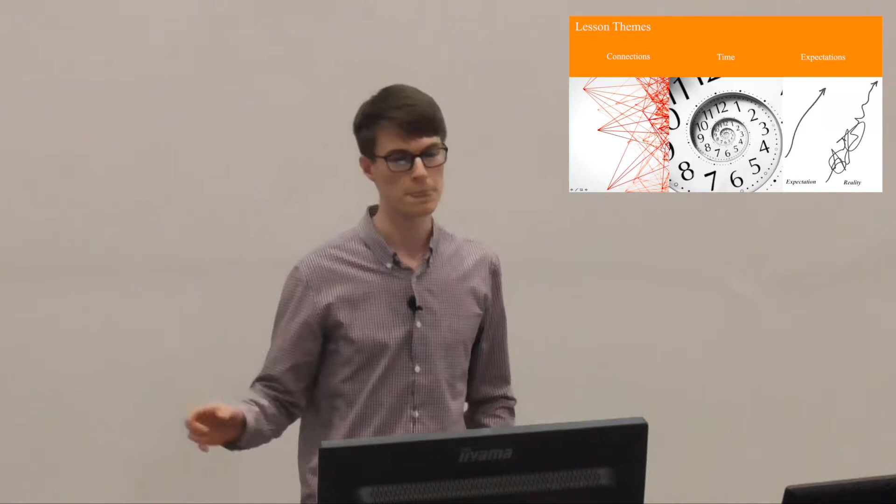Throughout what I'll be talking about, it was mentioned previously about the stages through a project from zero to all the way done. These are the RIBA stages of work that the Royal Institute of British Architects have established, and they help give guidance on what goes on at each stage of the project. So I'll be using that as a bit of a background and a reference.

It's not often you'll get to see stage 0 to 7 within 3 months, so that was a really, really good experience for me.

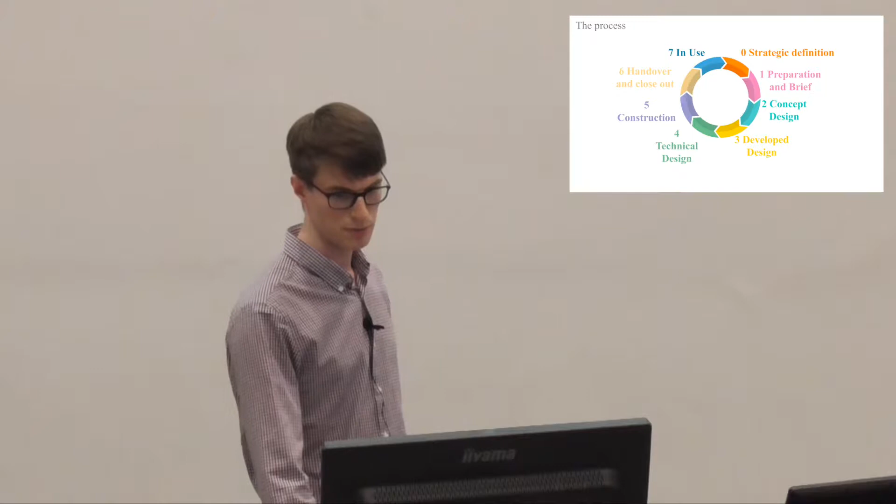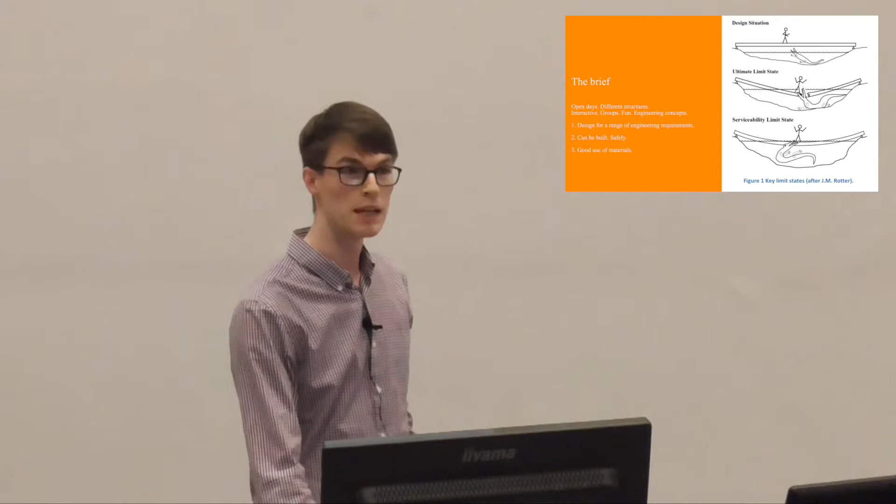We need to design for a range of criteria. The ideal at the top is where everything's all hunky-dory and it doesn't fall over or anything. We want to really avoid anything breaking. And the last thing is actually a lot of the materials we design flex a lot, and they'd be fine, but it'd be quite uncomfortable for you and me to be walking on a floor that does this. Structurally it's fine, but we've got to design for people, because people use it. Why else would we build things?

The fact that this project was to be built by students meant it needed to be built safely, and also be a good use of materials. Demonstrating what we do is important. So the bridge itself, a 3 meter span, quite small, but enough for a person to walk across, had to be built within these constraints.

So how do you start a project like this? Well, like any project, the appraisal of materials, some really quick ideas, just pencil and paper, and some thoughts about what might trouble you most, because that's what's going to trip you up later on in the project.

So having had a quick feel for form and materials, it was time to find someone to make it. And this was actually the first lesson: it's about using your networks, a bit like the other networks we're here for. Use those networks, they're really good.

I contacted over 15 fabricators, and only 4 of them replied. Two of them because I knew them really well, and two of them because I spoke to them on the phone and tried to convince them the project was worth doing. At this stage I didn't expect to spend so long searching for people to do it, and only a very small amount of time actually doing what I needed to do.

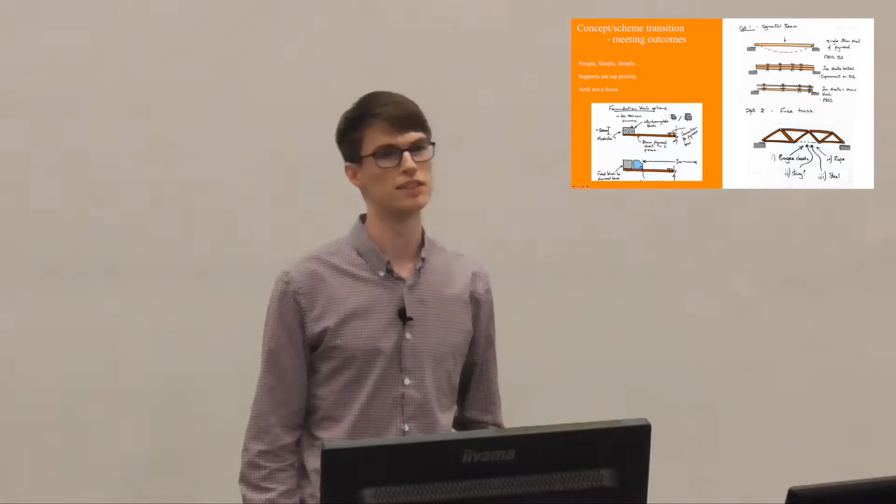We distilled a few ideas and reined in the world of possibility to some simpler ideas. Simple was the theme because we needed to get our message across. If you're trying to demonstrate a message to students or to people who don't even know what engineering is, you need to be able to show it in a clear way.

There were also some technical concerns, as he wanted these bridges to be able to grow and evolve over time, which meant the supports were really important to make flexible and adaptable. At that point we said, let's forget about the arch, let's just try a simple beam. And he was quite interested in that.

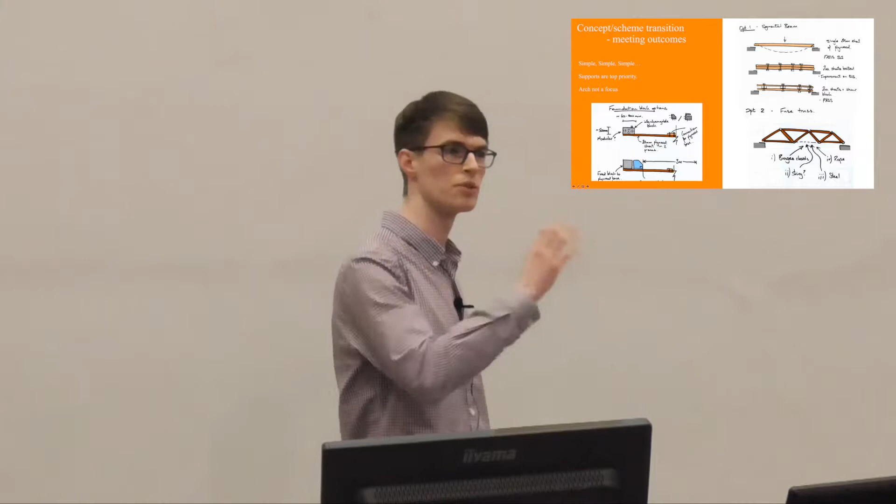You might think, well, what's a simple beam got to do with a lot of stuff? Well, actually, it can show you all about deflection. It can show you about failure, and it can show you how, if you use material in the right way, you can get a very efficient structure.

So we developed our design a bit more. You can see we've moved on to developed design now, stage 3. There were lots of problems you can try and sit in your bubble and work on at a desk, but actually it doesn't really work because you don't often know what's going on when it's being built and fabricated. So getting a contractor in early is really important. We had a meeting, and in that workshop it was really good to solve problems we hadn't even thought about.

Sometimes we do sit in a bubble. What we should have done is really had a second workshop, because it came later that the problem lies in the detail. When you really focus in on one or two little aspects, sizing elements or whatever, that's all well and good, but if you can't get the bolt in the right hole past another piece of metal, it's not going to work. So there's a limit to what drawings can do.

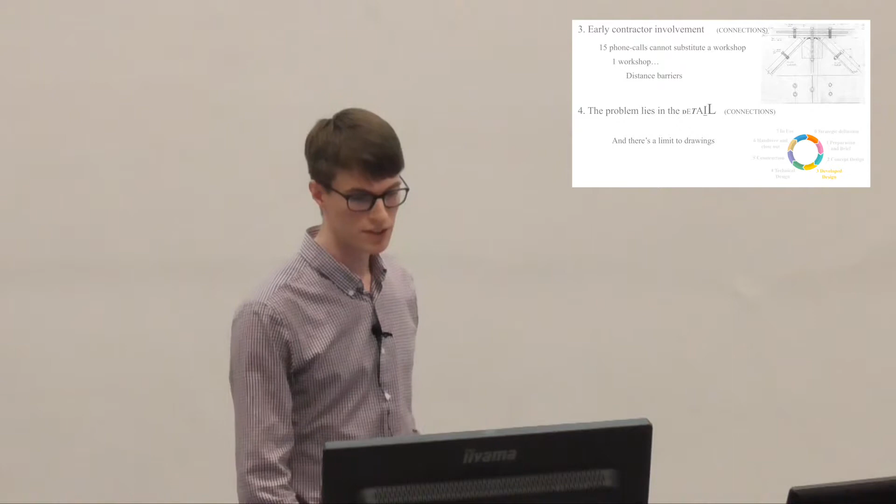Another lesson I learned was that it's good to make assumptions, and that's in large part what we do as engineers - make assumptions about how things work in the first place. But if you can actually create something from real data, it makes a big difference.

I quite like the quote from the Simpsons movie when Arnold Schwarzenegger was about to choose which option to fix the country, or blow up the country, or whatever it was, and he said, 'I was elected to lead, not to read,' and he just chose one. But actually reading is really, really important.

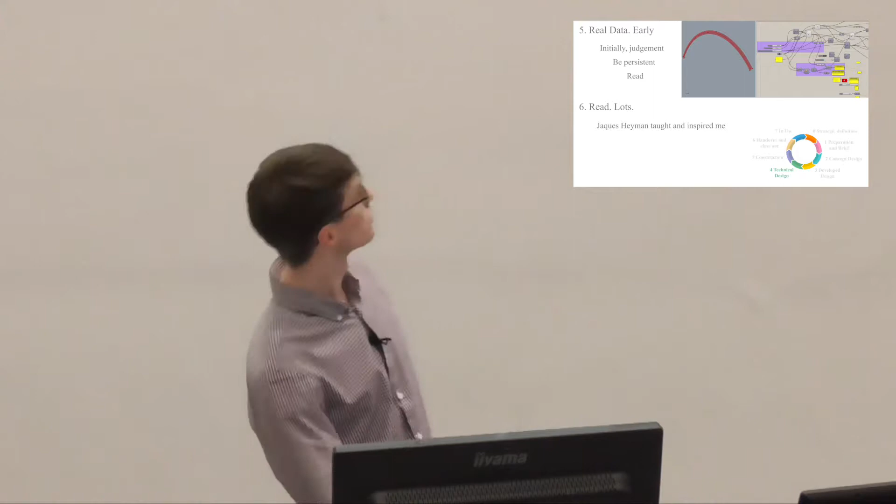I learned a lot of lessons from Jacques Heyman, who taught me some things about arches. So I just encourage you to read, whether it's as part of work or outside of work - it's really good. These were some of the inspirations that came from that reading.

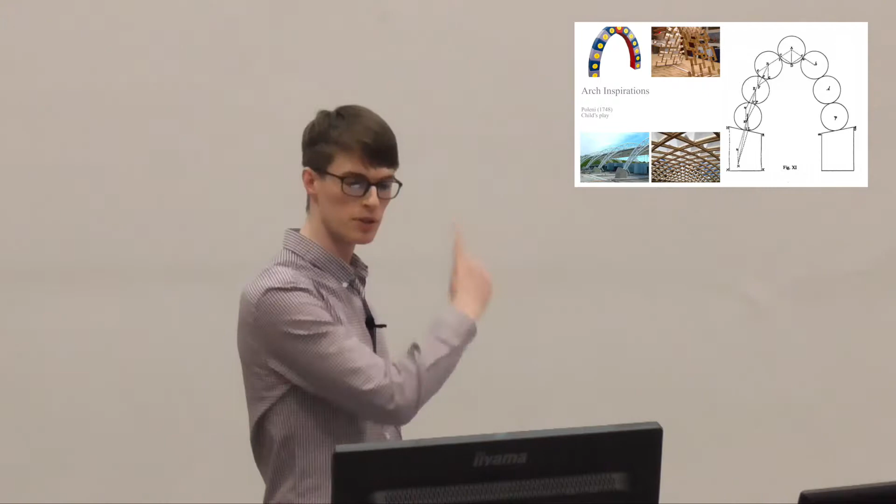Particularly Poleni - you've probably never heard of him - but in 1748 he developed the theory from a hanging chain that's in pure tension, and inverted it to be in pure compression, showing that you could actually build an arch from pure spheres. Clearly friction would have to be accounted for, and there are other things that make this rather an ideal case, but I had a good read about that, and it was really interesting.

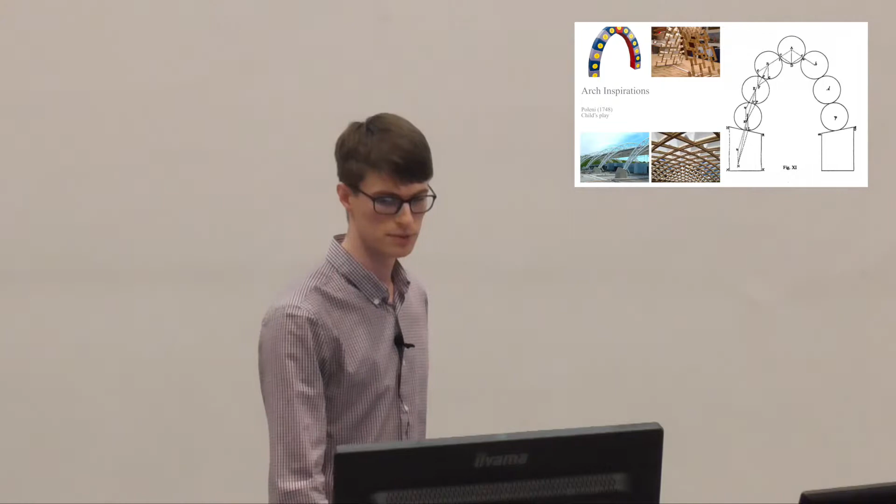So that's kind of what we're aspiring to as well. I'm quite ambitious in what I like to do - I try to fit too much in usually, so time management is sometimes an issue. But you can't, especially for open-ended problems, do absolutely everything. Sometimes it's easy to run away with what your ideas can give you, but sometimes you have to limit yourself and stop yourself and say, no, let's do the simple stuff and let's stop here. That's a big lesson for me personally.

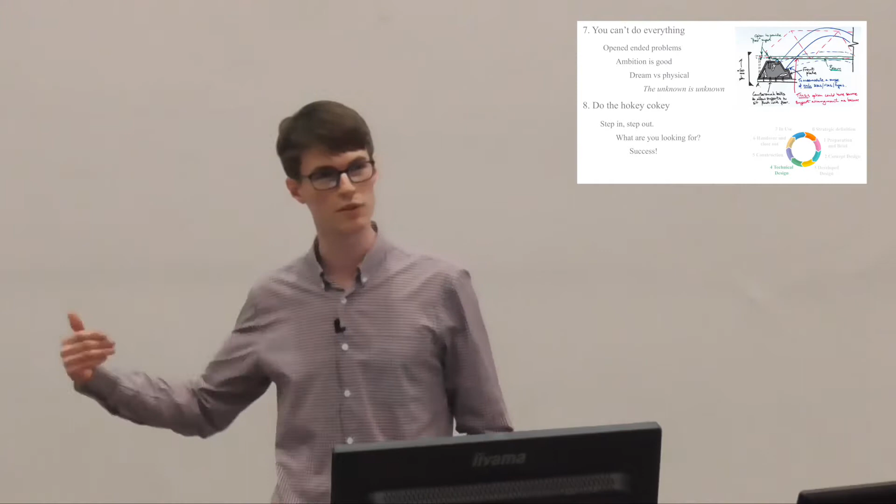One of the final lessons about the individual stages in the project was stepping out of what you're doing - again, getting out of your bubble and looking at things from a different perspective. Maybe inviting someone in who hasn't been on the project and just saying, can you have a look at this? If you do that, it can give you the invigoration and drive to get better results later on. So step in, step out, and look at what you're really looking for, because this can help you give success.

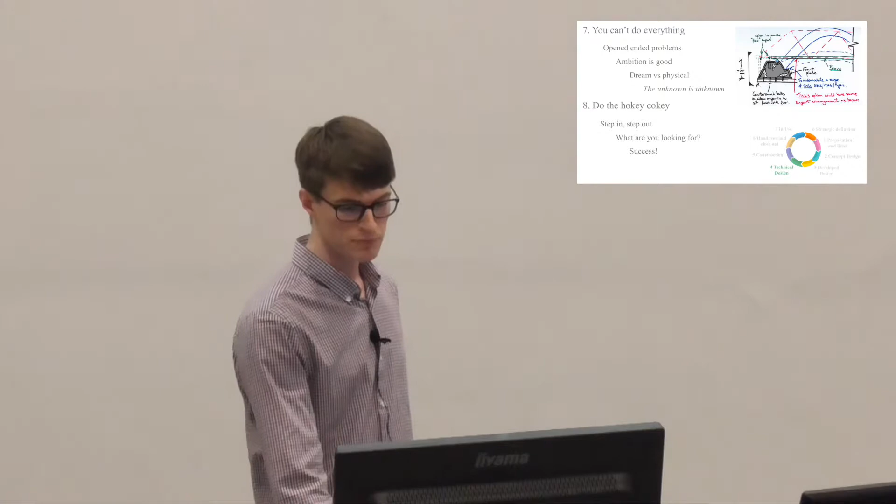So I've talked about each different stage just before construction, which we were able to pass off onto a fabricator. But there are some lessons that developed throughout the whole thing, that kept coming up again and again.

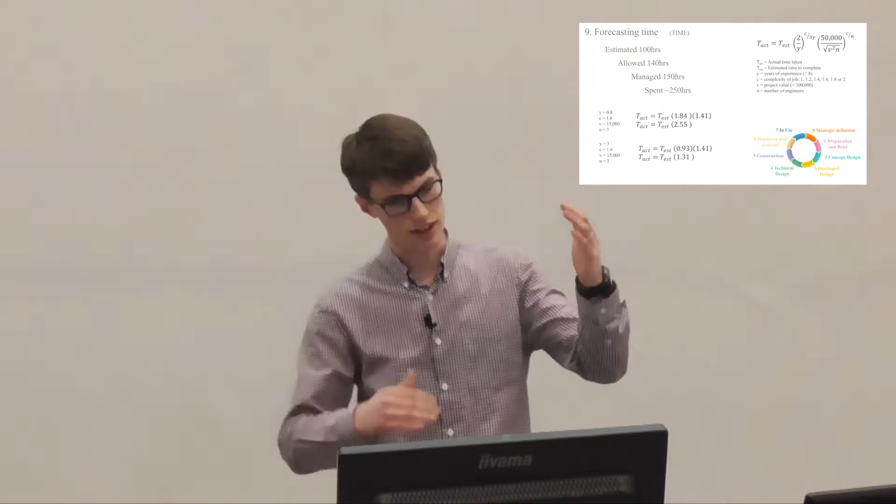The first one was about forecasting time. I was, as I've said before, fortunate enough to be given the opportunity to do this on my own steam - I was given as much support as I needed. So I thought, well, okay, let's plan all the activities out and see how long I think it will take me. But actually, when you guess, you probably don't know. And when you're a young engineer, you've got loads of learning to do, and sometimes managers don't account for this - and you forget about it as well. You end up staying late, or reading loads on the train, and that's all good stuff. So I came up with this equation.

Glad it got a laugh. It didn't last time.

As engineers, we often have to work with very complicated equations that we don't really know what they mean, so don't get bogged down in it. Basically, if you have a complex project with a lot of learning to do and you're a young engineer, chances are it's going to take longer than you think. That's the long and short of it.

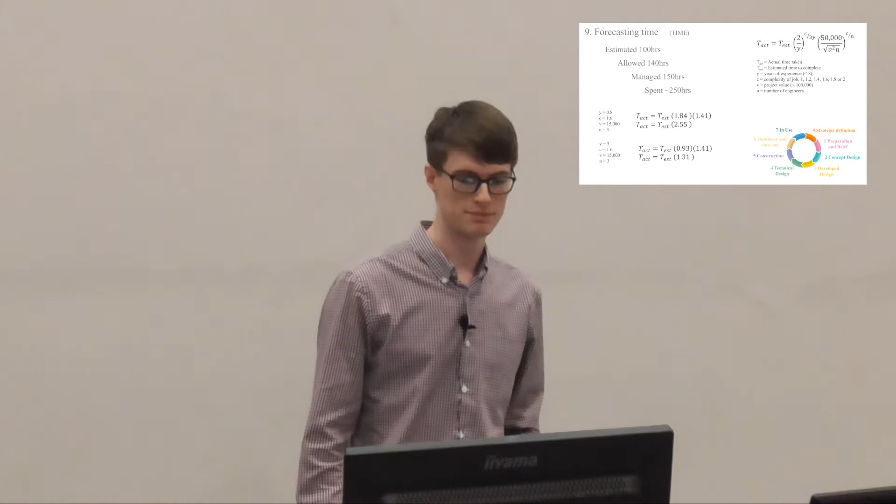I had less than a year's experience. It was a fairly complex project, quite small, which often means it's actually quite big. But I reckon if I did this in two years, I'd do it in half the time, because when you've learnt all that stuff, that's what moving forward is all about.

As part of this, I created a big program, thinking I had it all under control, and as you've already seen, I spent a lot longer than I thought. This kept developing and growing in size. But it's a really good way to manage how your budgets are being spent and plan upcoming tasks - a very useful tool. So you think you're on top of it.

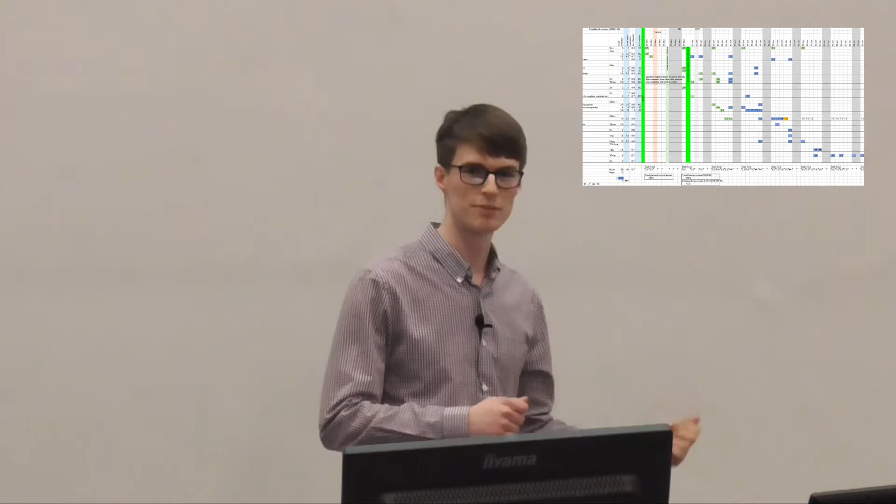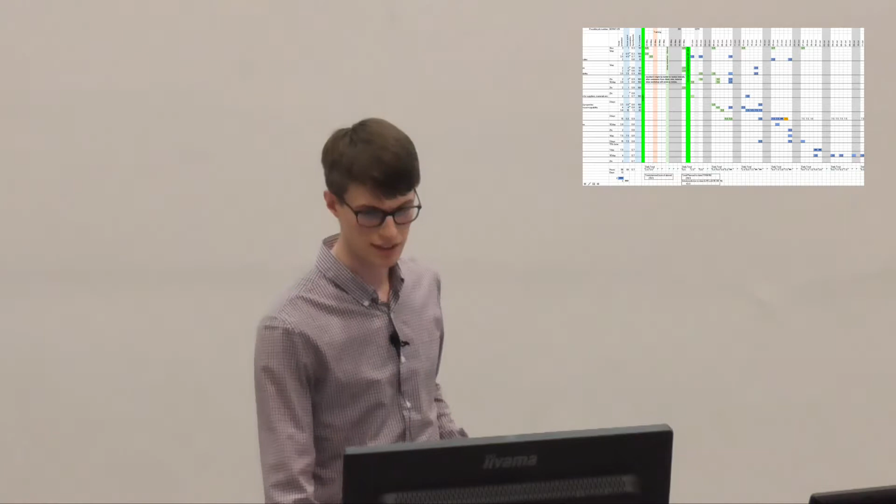But as I've just said, if you don't know what you're doing, your guess is probably going to be wrong, especially with something you've never done before. Which is why we have experienced managers who have the real data - they have it stored up here. They might not have it all written down, but they know how long things take. So how can you combat that as a young engineer?

Well, try to set yourself false deadlines. I really struggled with this at uni - if anyone could give me any tips, I'd be interested.

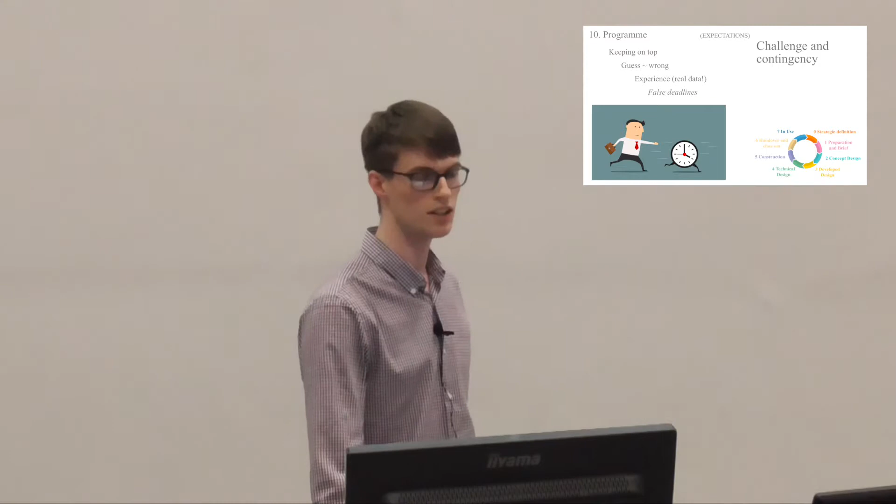It's about having that challenge to push you to do things, because if you set long deadlines, you'll probably use all of that time. But have contingency as well to fix mistakes, because chances are you will make mistakes, and that's a really good thing. So don't let it run away with you.

The last lesson I want to share is about the promises you make. Particularly for me, being really ambitious with loads of crazy ideas, I like to think I can do everything, as I've already said. The first two lessons I mentioned - the time and the program - help manage your expectations with real data. But you need to be really careful at early stages.

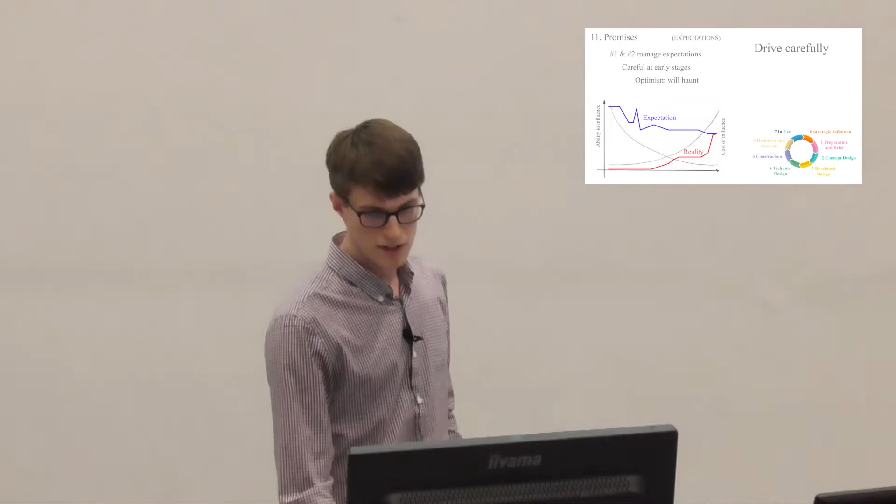So drive carefully, especially at early stages. So those are the lessons. How did I get there? Well...

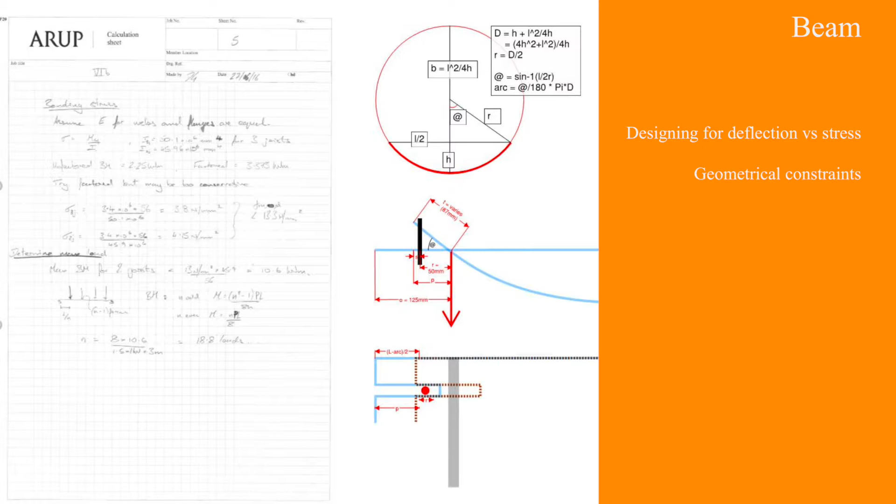I started as a structural engineer designing for deflection versus stress. That's quite an odd thing to do, because we don't usually allow things to deflect. So that was a really interesting part of what we had to do.

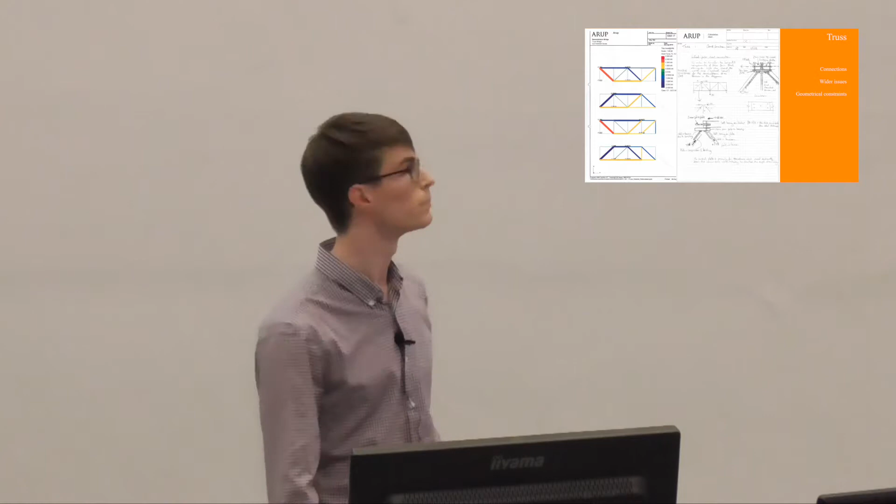Also producing quick drawings to allow the fabricator to get an idea of the cost, doing some analysis to figure out whether my members were big enough and whether this bridge was actually going to work. Again, producing costing drawings, and then producing construction drawings once we'd ironed out all the problems - I say all, but we didn't iron out all the problems until it was actually built.

We did all these by hand because we were doing them on the train, and yeah, not enough resource in the project - that's some of the learning I had. So again, producing detailed drawings of what was going on with all these tiny intricate parts of this bridge, or I say bridges, because there were lots of different types.

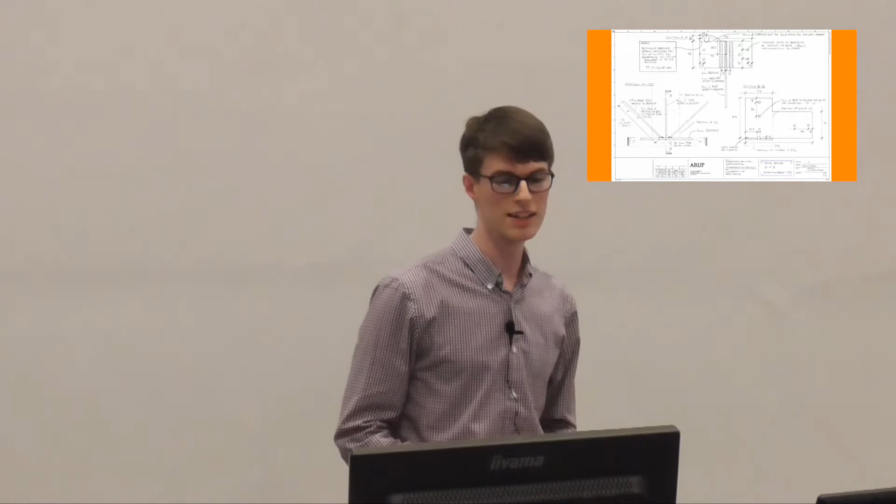Detailing to someone else, that's what I found difficult. I knew everything that was going on in my head, but no one else did. Even when I thought I'd shown everything, one of my engineers came to me and said, how does that even work? I just hadn't written something down.

I talked about the foundations as well, about how that can incorporate all these different structural types and try to be as flexible as possible, but at the same time be able to be carried around by a few people. Eventually it produced this.

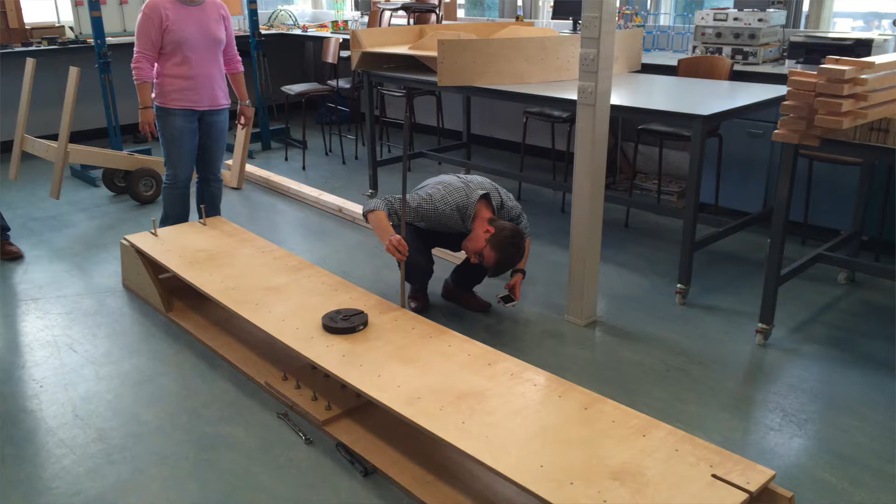This was the beam, and you can see me there measuring carefully the deflection, and actually the numbers work, physics works. It's good, that's what we do, that's engineering. So although I was surprised, you shouldn't be, it's what we do.

The arch was a really interesting one. Back to Poleni in 1748, he came up with these surfaces that weren't quite right. So I took that and said, well, what if you could make it move? What if you could see the failure as it's happening rather than it just go boom? And so that was what happened.

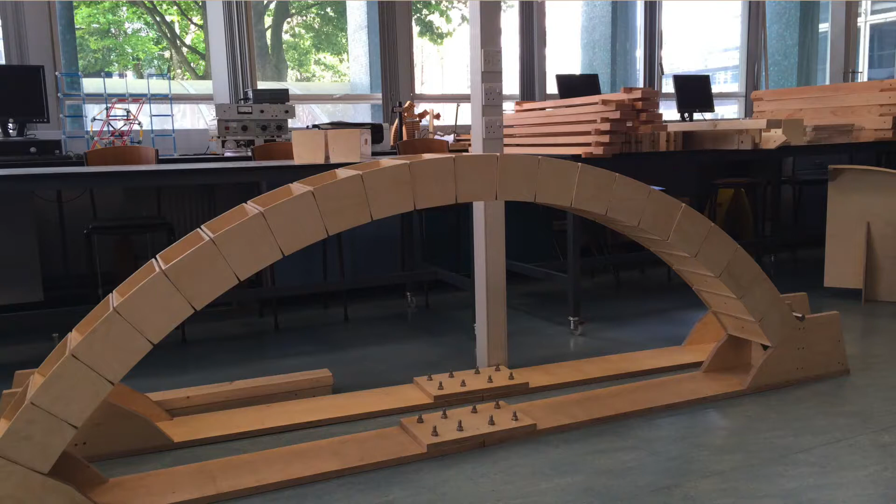I'd love to show you a video, but it doesn't really work very well, so I'll just show you that. You can see each member is slightly curved, and as it collapses, you can see it roll, and it's a bit dynamic. So that was a good bit of fun.

I'll talk about the structural engineers for maybe not quite as long as 10 minutes. But has anyone got any questions about that project or anything in it?

This was a real project, it wasn't just like a student exercise. Yeah, so it was paid by the University of Manchester to deliver these bridges. Yeah, so good learning experience.

Any more questions? Are you using CAD now? Have you got the resources? Yeah, well, with 3D Revit and yeah.

So if there's no more, I'll move on to the institution. Like Valerio said, I'm not going to tell you everything about the institution, just a brief summary of what we do. It's much like every other institution, we're about keeping our members happy and making sure that everything's all right.

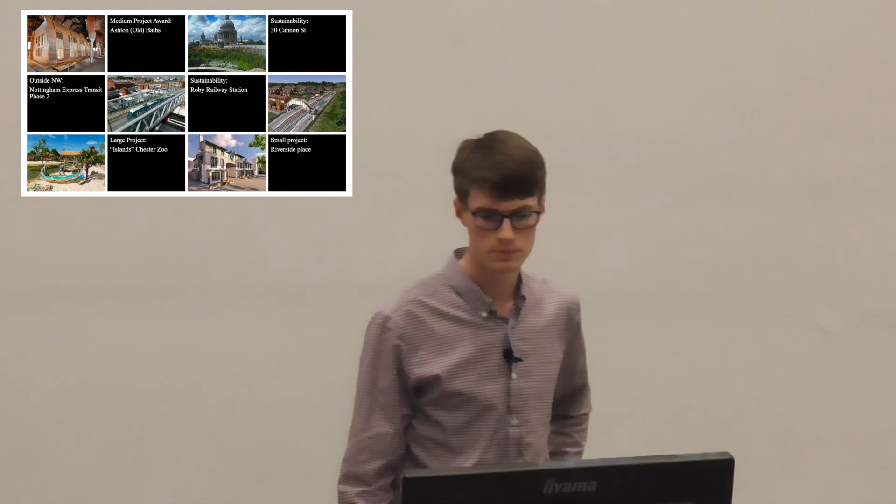We also have our local awards, the Northwest Structural Awards. This is a chance for us to celebrate local projects that have maybe made a difference or they've been a bit different and shape the world around us to be a better place.

Finally, I just want to say that you'll hear of the Young Members Committee, quite a few of whom are here today in organising it. The region really benefits from a strong and diverse range of young membership, which serves the profession in a similar way to the main committee, organising social events, workshops, etc.